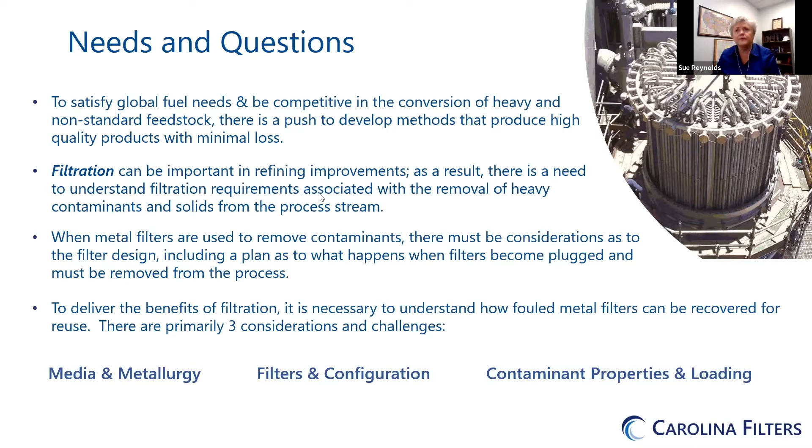Now, as we discuss that, there are definite challenges. There are challenges for you as the refiner, but there's also challenges for us as the cleaner and the manufacturer. And some of those challenges will relate to media and metallurgy, the filter design and configuration, and also the contaminants that are embedding within the media and how they're loading. And so first of all, let's talk about some of the challenges of media and metallurgy.

Well, media will definitely have an impact on the cleaning process that is used to remove the contaminants. Whether you're looking at some type of multi-layer wire mesh, sintered fiber, or various combinations of the various media, or if you're just looking at a porous metal media. So whenever we are looking at those types of things, we must consider not only the chemistry, but the mechanical delivery of the chemicals and how we're able to clean the filter.

So one of the first questions to be asked is, well, tell me a little bit about your media. What are you using? And then, of course, the metallurgy, very important. In most applications in refining, for example, and we'll talk more about this a little later, high temperature oxidation processes are required. And then, of course, some various chemistries. So it is important to understand the metallurgy so that we can understand the restrictions, the constraints of that media in terms of temperatures or chemistry.

For example, we would not want to exceed certain temperature limitations for a 300 series stainless. And we would certainly not want to use nitric acid with iron aluminide. So those are very important things to consider. And those sorts of things would be information that we would go to the manufacturer for, because the refiner or the user may not know the answers to these questions. But those would be questions that Pat, or whoever, would be able to answer for us. So whenever we're looking at how we're going to go about cleaning, media and the metallurgy, of course, is very important.

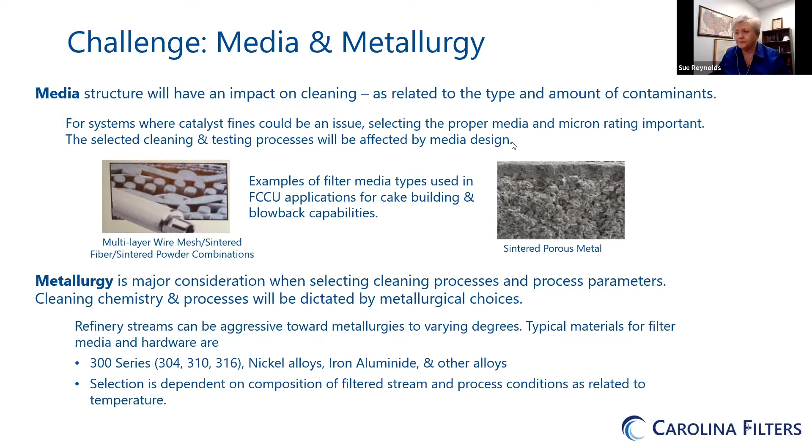And so it may be important that we would have to remove the tubes from the tube sheet, clean, test, and then install them back into the tube sheet. And then, of course, you may end up sending your filters out in tube form, where you keep your hardware and you remove the tubes from your bundle. And so it is important for cleaning in terms of how do we rack, whether it's assembled or whether it is individual form. What type of connectors do we need for our flushing systems? And do we need welders for disassembly or reassembly?

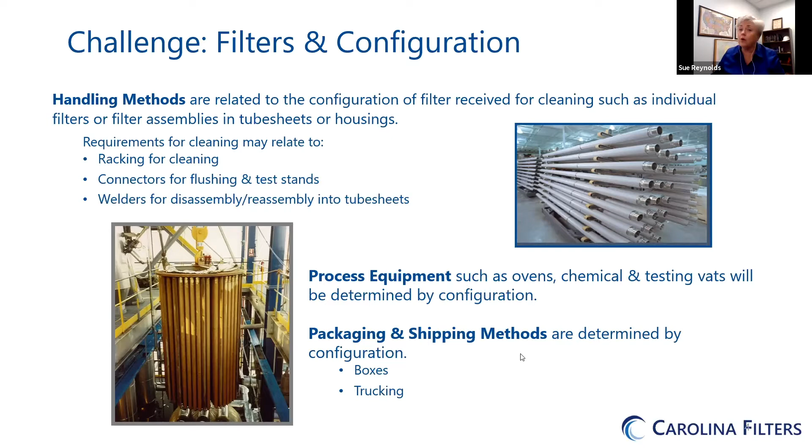Process equipment is also important. If it requires high temperature processes, do we have an oven large enough to support your filters? And of course, packaging and shipping methods on the return trip. Very important. We have had filters come in containers or boxes that were not very stable, which could result in damage along the way. So boxes and how filters are shipped are a very important part when you're considering cleaning filters.

Another challenge, and this is a big one, what are the contaminants? And tell me a little bit about the loading. Are the contaminants organic in nature? Are they catalyst fines that maybe have embedded the outermost angstroms of your filter media where your backflush is not being very effective? If they are organics, where are they? Are they blinding the outside, or are they embedded within the media? And what are those organics?

Could they be asphaltenes? Well, I guess that's the big name for refiners, asphaltenes, especially if you're getting feedstock that may not be as good as you would like, or if maybe your process temperatures have moved around so that you start having precipitation of some of these materials. So that can be a big problem.

Or do you have inorganics? Are these inorganics inert materials such as diatomaceous earth? Or are they some type of salt where we can use some type of chemistry to break them down? So all of these are questions. Filters, when you consider cleaning, these are the kinds of questions that must be answered in order to develop an effective cleaning process to remove those contaminants and return that filter to like new condition.

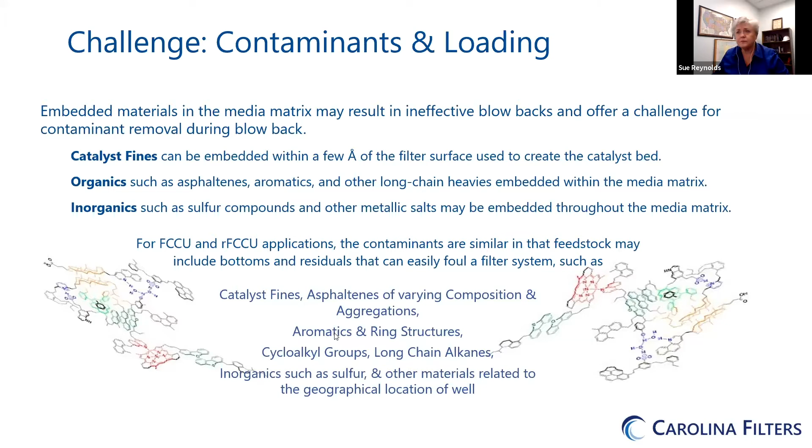And backflush or blowback systems are very important when it comes to, say, an FCC unit where you are creating a catalyst bed either on the outside of the filter cartridge or on the inside. And that catalyst bed serves a purpose, either in promoting or not promoting certain reactions within the stream, such as sulfur removal, or just building a filter cake of some sort. So the problem is sometimes these catalysts will begin to break down and begin to embed within the media.

And like I said earlier, this embedding may just be on the outermost angstroms of the filter surface, but can cause terrific problems when you're trying to blow these things back, because if you're talking about a porous metal or some type of wire mesh configuration, these inert particles may get caught somehow within the media because they can have irregular shapes. And your blowback may be totally ineffective in trying to remove them.

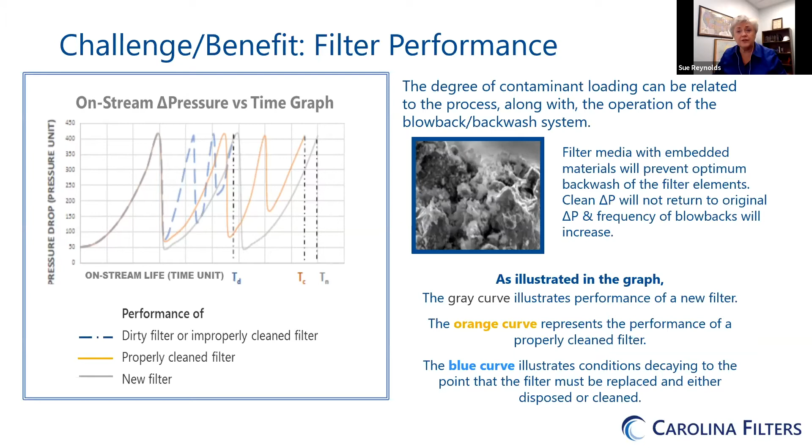And this is a picture of some porous metal media that is plugged. And you can see that if you start embedding material in the media, or even on the surface of the media, where your backflush is not being effective, that this is what may be going on within that media. So when I say it's a challenge and a benefit, it's a challenge if you have issues, and it's definitely a benefit if you can solve those.

So what are the cleaning steps that we might be using? Well, the way we look at it, there are 3 parts to cleaning. One is gross contaminant removal. And many times this is the step that is done at the refinery. Maybe you have a lot of surface contamination, oils, the internal part of the filter. Maybe it's a filter where the upstream side is the inside of the filter, okay?

And so everything flows to the inside of that tube, and maybe some things go wrong and you end up with a lot of contaminant packing within the inside of the tube. Or it could be something on the outside. So the refiner tries to blow back or wash out or remove a lot of these materials prior to sending it out for cleaning, because many of these things could be hazardous.

Now, when the filters do arrive for cleaning, there's still some gross contaminant removal that's done before you get into what we call the deep cleaning. When we go into deep cleaning, we're trying to target what is embedded within the media. So with that, we want to remove anything from the surface, anything from the inside, so that when you look at the filter, other than maybe some discoloration from heat from the refining process, it looks clean. So gross contaminant removal is very important.

So we move to the deep cleaning. Now, in the deep cleaning, it's all about what are we trying to remove and what type of media are we dealing with here? Is it a wire mesh? Is it a porous metal? Or is it some combination of various media types? So it is important to understand those things.

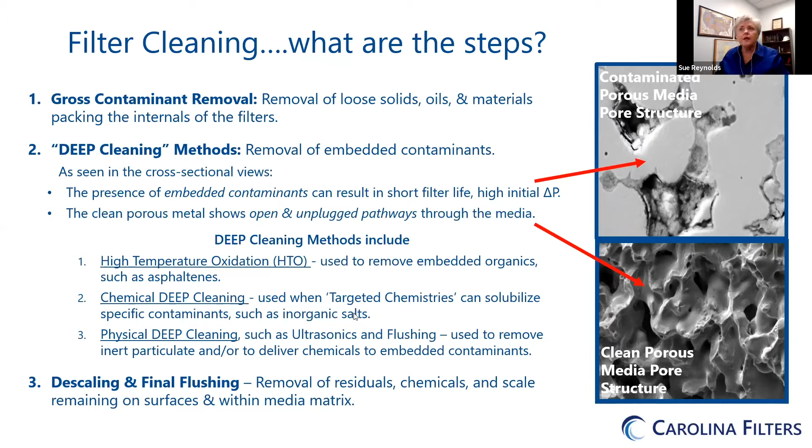But the question that you should ask is, how do you know it's clean? How do you know it's clean? Well, the only way to know it's clean is by testing, okay? Now, I did not include weights in here because these filters are very, very large in most cases. And the ratio of the weight of any leftover contaminant that might be in these pores versus the weight of the filter is so small, can you imagine the accuracy of that balance that I would have to use? Wow. So we're going to look at other ways of trying to determine whether or not we have left anything behind, or also is the filter of good integrity.

Even though the filter's clean, if the filter integrity is not good, then you may not want to put that or reinstall that back into your line. So how do we do this? Integrity tests are nothing more than pressure tests that are designed to characterize the size of the pores relative to the pressure created across that filter when you test it.

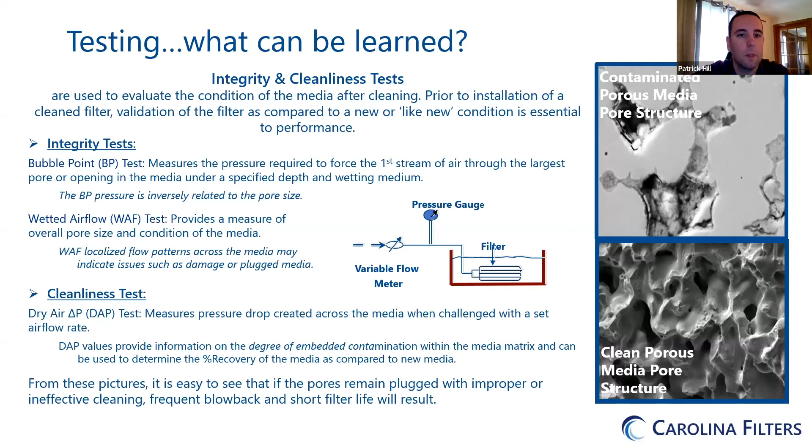You want to switch to the next slide? Yeah, there we go. Thank you.

So what does the problem look like? For each of you, it looks like short cycle times. It looks like increasing DP with each subsequent filtration cycle, and ultimately decreased filter life. What does that mean? It means, unfortunately, you have to shut down the filters more often than you'd like. You need to open up those filters. You need to change elements out, maybe because they were ineffectively cleaned, maybe because there was a process upset, maybe it's a little of both.

How does that come across to the manufacturer? The first thing we need to understand is, has there been a change in the design basis? Susie mentioned earlier in the presentation, filter systems, especially FCC and RFCC filter systems, are designed for a relatively predictable end state, a relatively predictable catalyst size and particle size distribution. Did that change? That would be really step one.

If it didn't change, maybe there's just embedded contaminants that weren't removed. And so let's take a look at that through some microscopy work, through some cleaning exercises. Those would sort of be the initial steps. And once we have an idea on what's happening, what's causing the process upset, this is where the cleaning company can step in and do their magic, which is how can we remove those contaminants and get us back to a good filter now that we understood the upset and can overcome the upset.

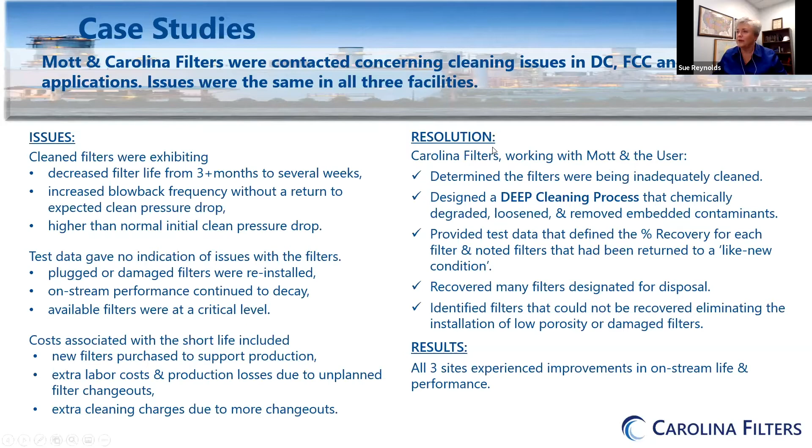Well, let's see. Okay. Oh, there we go. All right. Sorry about that, a little issue.

Okay. All right. So why do we go through this effort of getting a deep understanding of fouling, what's causing it, what the process upsets are, and how can we remove it? For each of you on the phone, you all have the pressure. You need to make product. Product is sold for money. Everyone wants to make money and be happy. So what is the cost of a filter change out?

And so that product has a value, and maybe that value is dollars per barrel. Your system produces a certain number of barrels per day, and any day that it's offline, you're not producing those barrels, or you may be sending unfiltered product that is less valuable to different parts of your process. And so to understand the cost of having your filter offline, you simply just need to know the value of your product, how much product you produce in a given unit of time, and how many units of time your system is offline because you are dealing with this process upset.

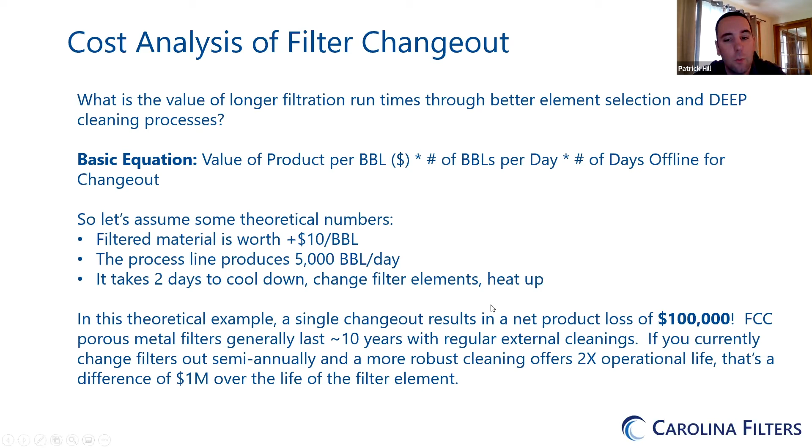Very good. So what are the benefits? When we talk about everything we've discussed today, I think one of the biggest benefits to the user is the coordination and the collaboration of the three of us in trying to figure out what the problem is and how to solve the problem. We depend on the user to give us information. What are your requirements? What's your filter configuration? What kind of specifications do you have? What are your contaminants? We've discussed these.

And then it's the cleaner's turn to come up with the optimum cleaning process based on their knowledge, the experience they've had with these sorts of things. And of course, the testing. You just cannot de-emphasize the testing for integrity and cleanliness.

And as a manufacturer, what we provide is a deep understanding of the physical components. What are they like? How big are the elements? How do you connect to the elements? What is the metallurgy, the micron rating? And what cleaning requirements or restrictions do we have with respect to that? And lastly, it's integrity criteria. So we want to be able to provide both the user and the cleaner limits to operate in.

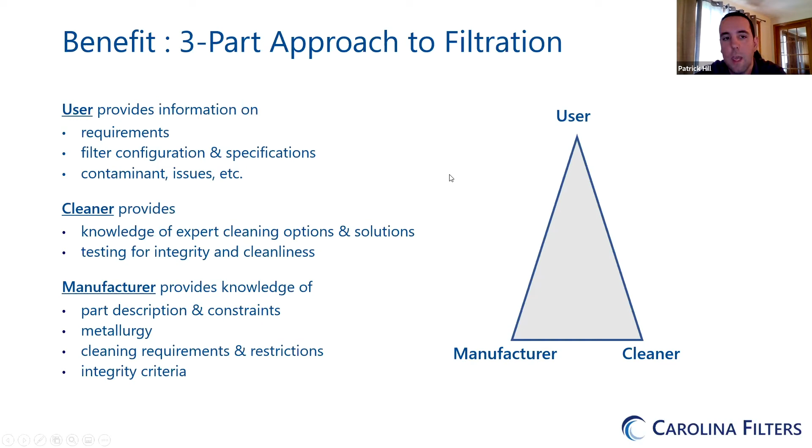Do not exceed an oven baking temperature of 800 degrees Fahrenheit, as Susie mentioned earlier. Do not exceed a differential pressure of whatever that value happens to be for the given element configuration. It's really best when all three of these organizations contribute with the knowledge that they know to help solve an overall problem.

So benefits are good things. It's all about throughput, as Pat described. That's everything to the refiner. And so it's important that when you put a filter in, that you know how it's going to perform outside of external issues in your process that are not related to the filter. You certainly want to understand how clean that filter is.

And as he mentioned earlier, if you go with filter cleaning as long as you can before you have to replace, there's definitely a savings in terms of filter cleaning cost versus that of a new filter. And turnaround: generally filters can be turned around, depending on the number of filters and the process used, within about a 4-week period as compared to 16 plus. And I'm not sure, Pat, you would have to comment on that.

But then again, if you pull a dirty filter and just replace them each time, now you are dealing with environmental concerns in terms of disposing of these things. So these are the things that are considered, that are the benefits, the good things associated with filter cleaning.

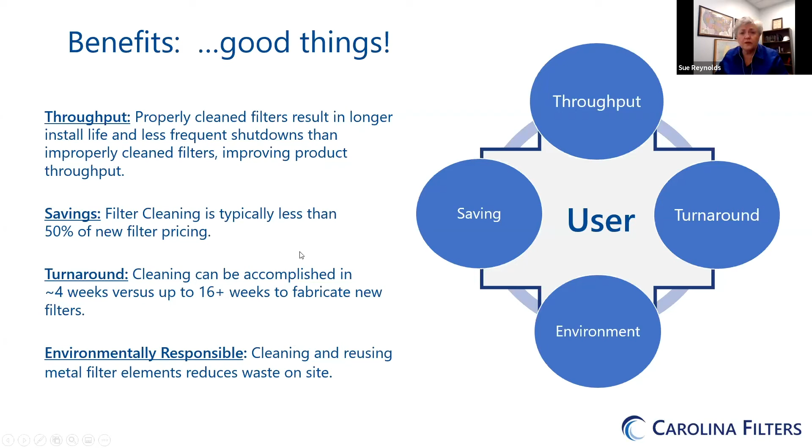Now, in closing, the benefits for the refiner result when the cleaning vendor and the filter manufacturer work together to resolve the challenges associated with filtration. And we've talked about a lot of these challenges, such as reducing the costs associated with changeouts of improperly cleaned filters, developing effective cleaning processes for the project that we're working on, and validating the integrity and the degree of cleanliness prior to installation. That is so important. And of course, reducing the environmental impact of disposal.

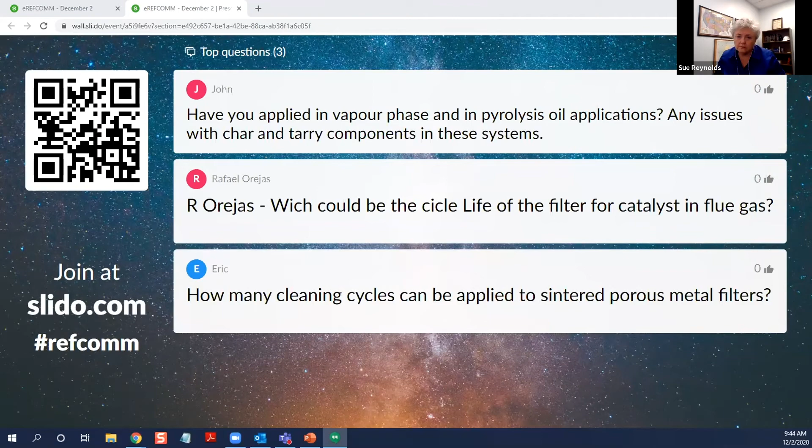Okay, our next question is, what could be the cycle life of the filter for catalyst in flue gas? Raphael, great question. I have to give a sufficiently vague answer because every installation is different. What I can tell you in a flue gas operation, the primary degradation mechanism is likely going to be erosion from high velocity of the catalyst. A gas operation typically can operate significantly longer than a liquid operation before needing external cleaning, such as the nature of a back pulse versus a back wash.

But generally speaking, a year or more between external cleanings should be a reasonable target, and a total lifetime of about a decade should be a reasonable target if the system is properly designed and operated.

Okay, Eric asks, how many cleaning cycles can be applied to sintered porous metal filters? That is a very good question, Eric. And I'll start my answer by talking about a project where the process itself, I can't really get into what that process was, but it was very degrading to the porous metal. In fact, components of the metallurgy, you might say, were being removed, which of course was just destroying tensile strength.

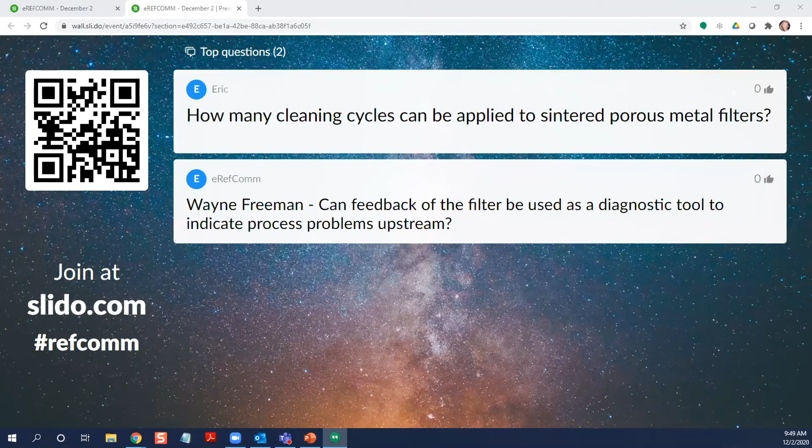Okay, our next question is from Wayne Freeman. Can feedback of the filter be used as a diagnostic tool to indicate process problems upstream? Yes, yes, it can, and it does. It happens all the time. It's what my group does almost every day. The filter can be a great diagnostic tool, especially when you have historical data from a good known operating point.

For example, let's say that you had a process upset, or let's say maybe you had a different feed stream, a different crude oil or something like that. You're seeing the behavior of the filter that is meaningfully different than what you're used to. Let's say your cycle times are less than half of what they normally are. Your differential pressure rate of increase is 2 times higher than it normally is. That will originally start as a question of, is the filter working properly? From that, you can then back diagnose what's happening.

Maybe instead of the vast majority of your solid contaminants being alumina silica catalyst fines, maybe you've introduced some tar or wax or asphaltene through something else in the process. Maybe you have a heat exchanger issue where the temperature is so low such that you have some precipitation problems. So short answer is yes, the data collected from a filter can be used as an excellent diagnostic tool when you are able to compare it to historically good operation.

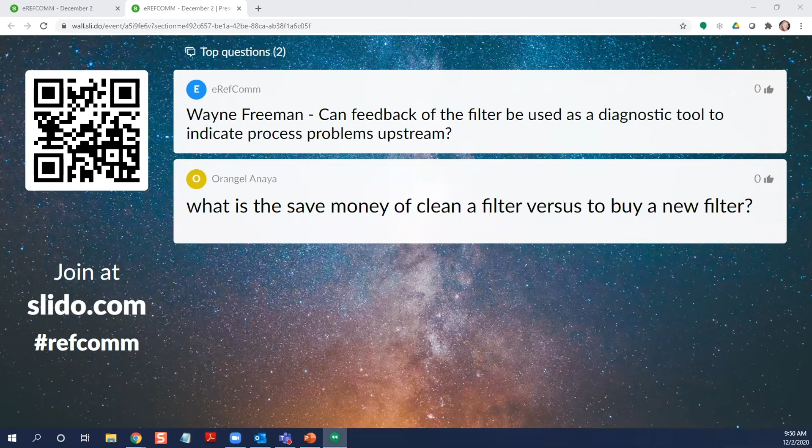Okay, next question is, what is the monetary savings of cleaning a filter versus buying a new filter? Well, in terms of filter cleaning relative to the purchase of a new filter, Pat would know what that number is. In terms of what is done in cleaning, it of course depends on the process. It depends on how many filters. It depends on the size of the filter. Various things go into that. But generally speaking, I would say, I don't know, Pat, maybe 30%. Yeah. Certainly, I would say less than 50%.

Again, it just depends. I'm sure if you have a Hastelloy cartridge versus a 316 cartridge, there's a big difference in terms of what those cartridges would cost. So there's a lot of depends there. Yeah, I agree with the general range. One thing I just want to highlight here, obviously filter manufacturers want to sell filters, but let's not lose sight of the sustainability aspect here. Our filters are designed to be reusable over and over again.

That's the purpose. We hate to see filters thrown away when they could be cleaned and reused, because that doesn't make any sense for anybody. It's generating waste at the plant. It's not taking advantage of the robust nature of the element, and whether that's Mott as a manufacturer or anyone else, I think the sustainability component will help drive the need to clean multiple cycles.